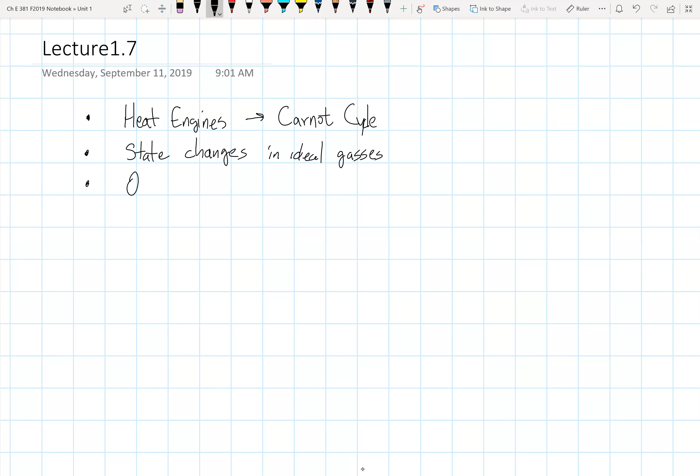So ideal gas equations are useful even when you're dealing with real gases. And then we'll start to talk about process analysis, where you're using entropy calculations. Somewhat analogous to an energy balance, we're going to have an entropy balance, with the main difference being entropy is not conserved. In the ideal world, you can have conservation of entropy, and that's a reversible process. So it's only conserved for a reversible process, and that's where delta S is going to be 0.

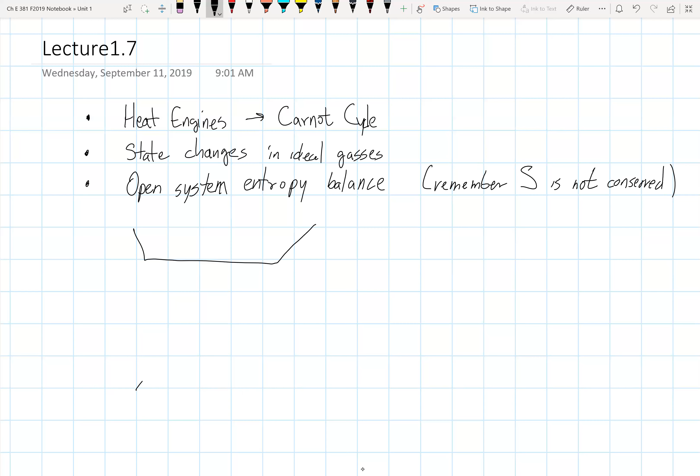Okay, so let's start with the heat engines in the Carnot cycle. So the last thing that I did on Monday was start to argue why heat can only go from hot to cold. So the picture that we have is we've got a hot source and a cold sink, and you've got some heat that's leaving the hot reservoir. It's going into some process, and then it exits to the cold reservoir.

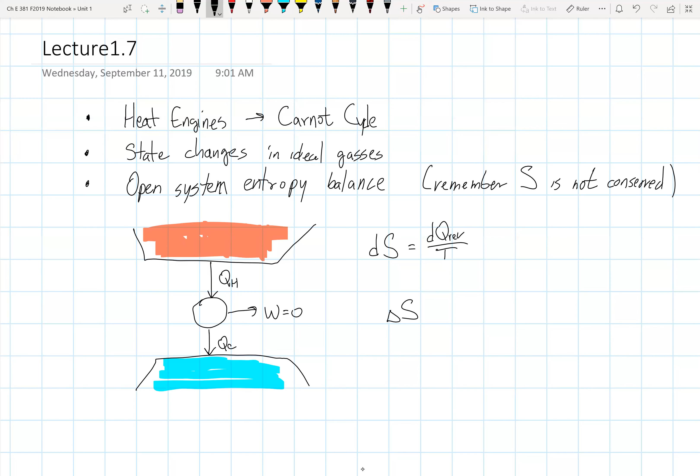So if we start with one of the expressions of the second law, that says that changes in entropy are equated to a reversible heat flow divided by the thermodynamic temperature. And so if all this process is doing is transferring heat, so there's no work involved, then the delta S for that process with respect to the process is going to be minus QC times TH minus TC over TC.

Okay, when we go through these analyses, the signs are going to drive you bonkers. They drive me bonkers, and I guarantee I'll get it wrong at least once unless I'm in truly good form, and I don't think I've had enough coffee yet this morning to guarantee perfect performance with respect to signs. Okay, so the heats that I'm going to be using, this is defined with respect to the process.

So given that, is QC positive or negative? I know it's hard to talk, but you can raise your hand. Positive or negative with respect to the process? I want you to talk about it for 30 seconds, and then I'll take the poll one last time. And I want big, exuberant hand raises this time.

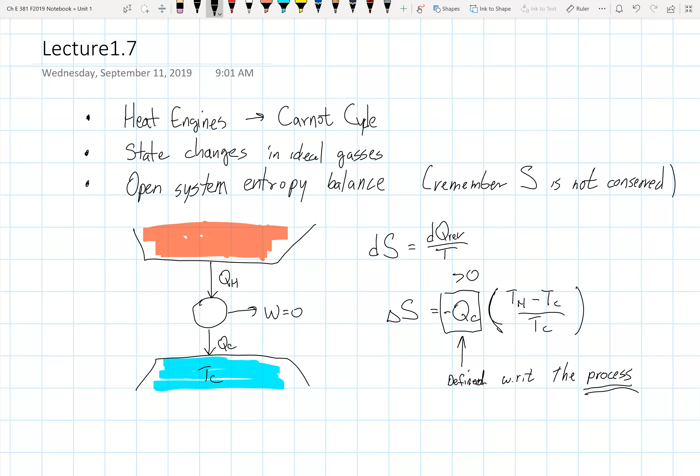All right, and this is a good thing because the second law says the delta S has to be greater than 0 for a real process, or it can be equal to 0 for an imaginary reversible process. So written this way, this is greater than or equal to 0 if and only if TH is greater than TC. Yes?

It's the same thing, just a different algebraic expression. On Monday, I didn't include the process, so my sign convention for Q's was different, and this is the same thing the book does. If you read the beginning of chapter 5, I'm kind of tracing through that derivation for you.

Okay, so first, that says that entropy can only increase if the hot is actually hot. All right, and so that's why heat flows from hot to cold. The second part of that is the only time we get to delta S equals 0 is when TH equals TC. All right, and looking at the math, that's kind of a, well, of course it is.

That's obvious, but conceptually it's an important observation because heat transfer is only reversible when there's no temperature gradient. So there is no heat transfer if it's reversible. There is no such thing as reversible heat transfer.

It exists completely as a figment of our imagination, which kind of makes this numerator part look a little fishy, huh? If heat transfer is never reversible, then how do you imagine it being reversible? Well, it's the isothermal process that we've been pretending is reversible.

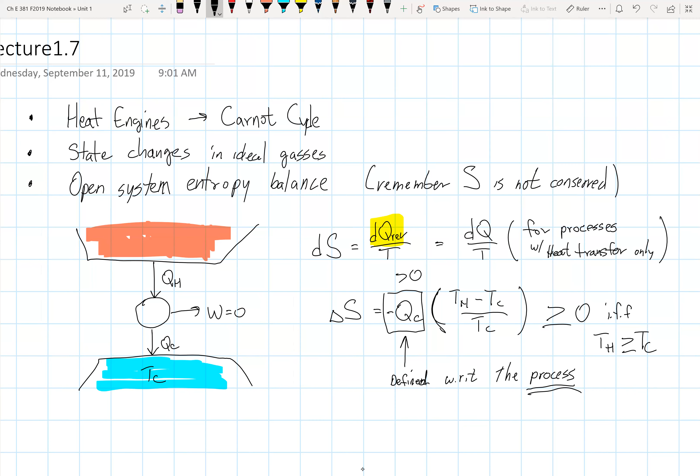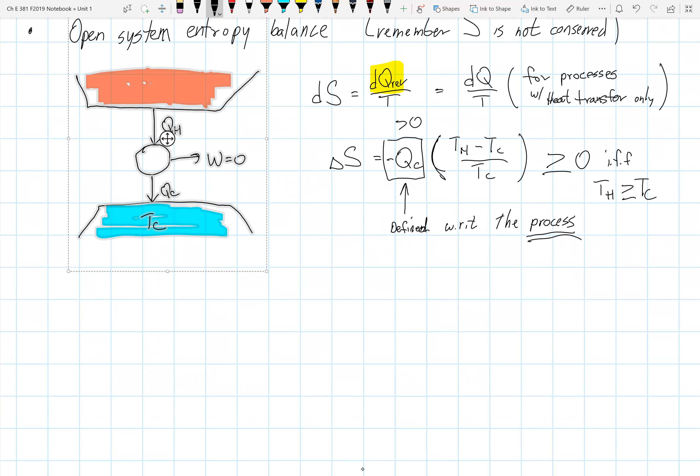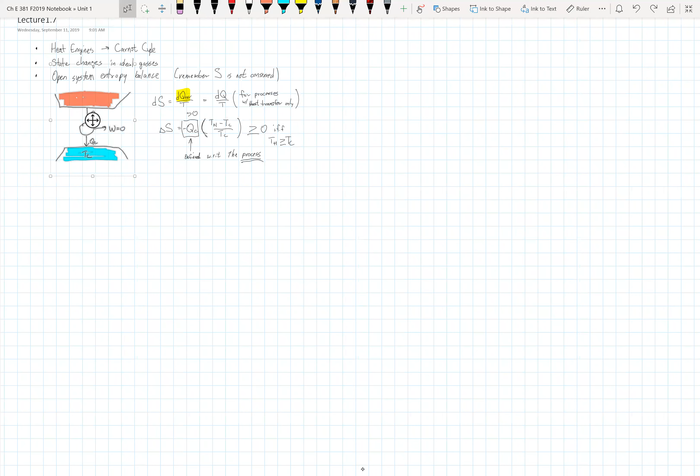All right, so now let's look at this again. Except now let's not constrain ourselves to a process that doesn't generate any work.

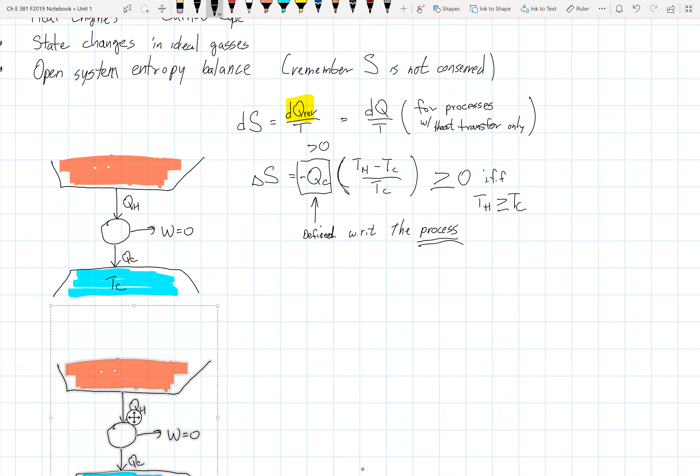All right, I want to be able to draw on you again. Perfect. All right, so we're going to take another copy of this diagram here, and so now the work doesn't necessarily have to be equal to 0. Okay, sign conventions again, is work positive or negative?

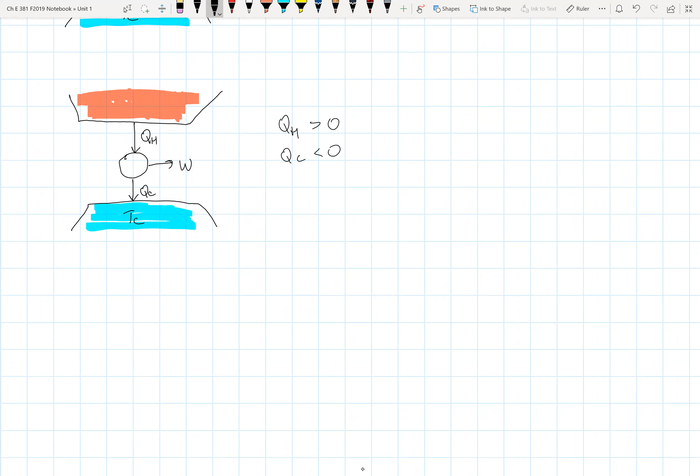It's negative, it's going out of the engine. So with respect to the engine, QH is greater than 0, QC is less than 0, and W is less than 0.

Now, previous editions of the text, when they went through this derivation, as an effort to make keeping track of all the signs easier, they used the absolute value bars on the heat symbols, and that's also something that I did slightly differently on Monday. I kind of like it that way because it helps me focus on the math and not trying to keep track of what's positive or negative.

But you can also make arguments that it's better without the absolute value signs because it makes the statements of the energy balances, for example, less prone to making mistakes as well. So let's look at this process then. We're going to use both first and second law now to get to the equations that we want. All right, so this thing, we're going to call this a heat engine.

And like the engine in your car, heat engines operate in cycles. So they go through a series of steps, and the state of the engine is exactly the same after one complete cycle, and it's ready to go again. So every time it goes through a cycle, it's going to consume some heat, produce some work, and eject some heat. So over one full cycle is what we're going to do an energy balance on.

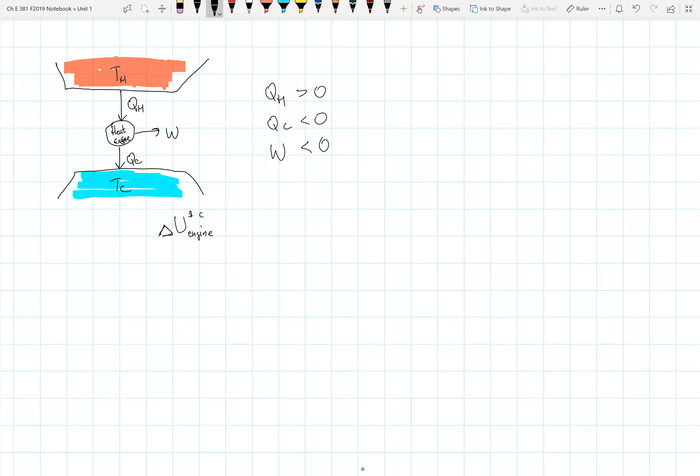So the change in internal energy for engine for one cycle, and it's a lot of decorative superscripts and subscripts, and I'm not going to write them every time, but I just want you to have that in your mind, that's what we're talking about here.

So I'm just going to say delta U for that, but we're talking about the engine, one complete cycle of the engine. Because it's a complete cycle, the state is the same at the beginning and the end, so there's no change in internal energy. Likewise, the overall change in entropy for the engine - both delta U and delta S are going to be equal to 0.

Okay, so for the energy part, delta U is going to be equal to the work produced by the engine - remember that's less than 0 - plus the total amount of heat injected into the engine. So that's plus QH plus QC, where QH is greater than 0 and QC is less than 0.

Because the sum of those things has to be equal to 0, we can immediately conclude that the work produced by the engine is just the negative of the sum of the heats consumed by the engine - the difference between the amount of heat going in and the amount of heat going out.

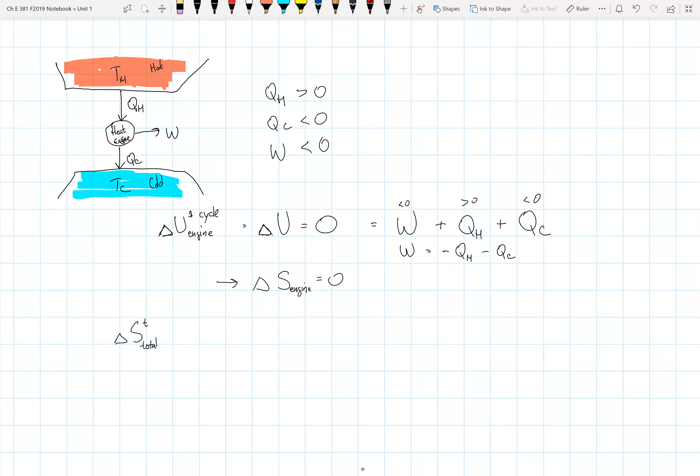So the delta S total, the delta S of the universe, that's going to be the delta S for the hot reservoir, the delta S for the cold reservoir, plus the delta S for the engine. And we've already agreed that that's got to be 0 because it's a cyclic process.

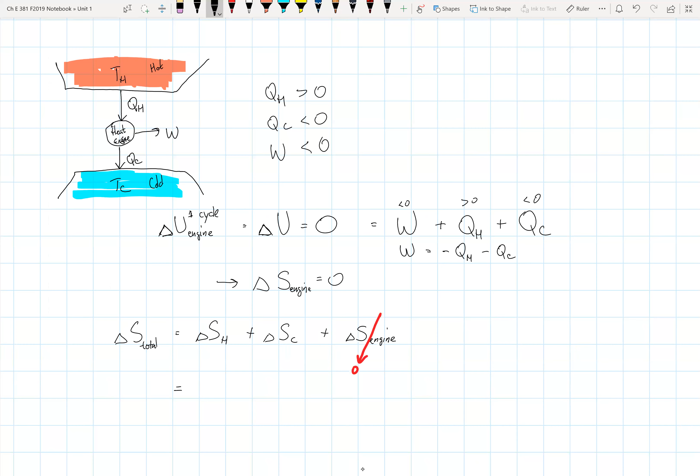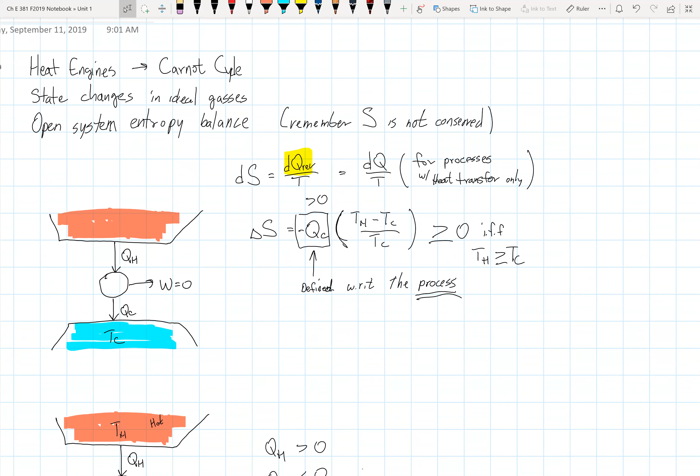All right, so the delta S then is going to be, for the hot reservoir, we're going to go back up here, and we're going to remember that changes in entropy are equal to heat flows divided by temperatures. And here is a place where you got to be careful with signs.

I wrote the symbols QH and QC with respect to the process, which means they are backwards with respect to the surroundings. So the amount of heat flow with respect to the hot reservoir is not plus QH, it's minus QH, because the arrow is pointed in the wrong direction with respect to the reservoir. That's a subtle point, and this is one of the easier spots to lose track of the signs.

And then the temperature over which that transfer happens is TH, of course. And then likewise for the cold reservoir, positive QC, even though QC is less than 0, plus QC is with respect to the heat engine. So if we're doing an entropy tally, that's going to be minus QC over TC.

And that's delta S total right there. All right, and remember second law says that this better be greater than 0, or if we've got our thought experiment hats on, then we can allow it to be equal to 0 for a perfect process.

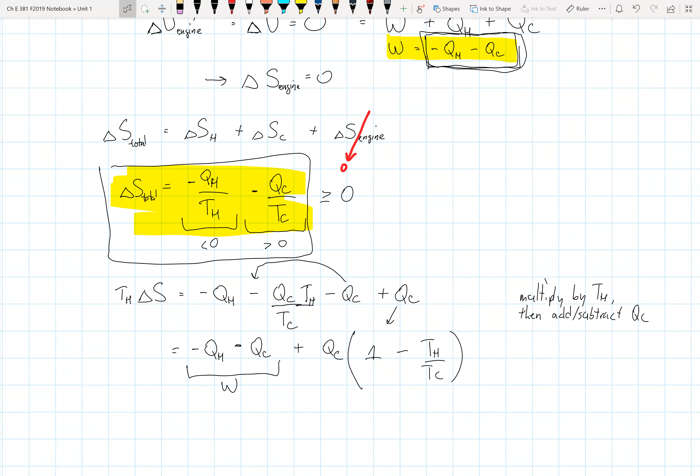So now to get the first law in there, we note that this is W by my first law equation. So that means that TH delta S is work plus QC times 1 minus TH over TC.

And if I want to rearrange this for work, which I do, we're going to say work equals TH delta S minus QC times 1 minus TH over TC.

So now that we're here, the first observation is that this is the work produced by an ideal heat engine when delta S is equal to 0. And for a real heat engine, delta S is going to be greater than 0.

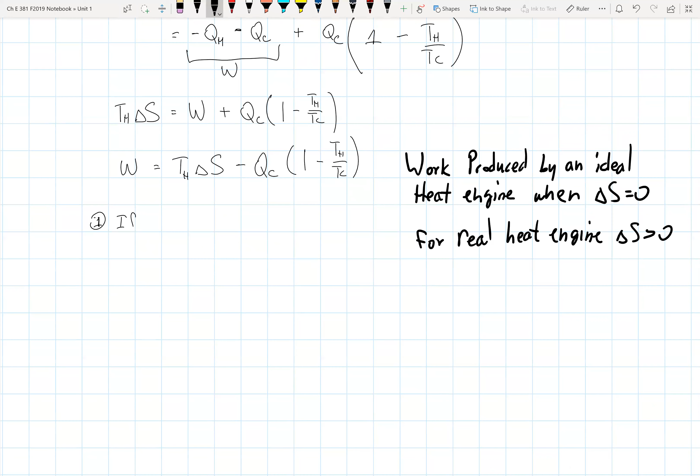So there's a couple limits of interest. The first is, what happens if there is no work? So if there is no work, then this just reduces down to a simple heat transfer that we started with. If there's no work produced, W equals 0, and we end up with delta S equals minus QC over TH times...

1 minus TH over TC. No, I don't want that minus there. So this one is just a rearrangement of this one.

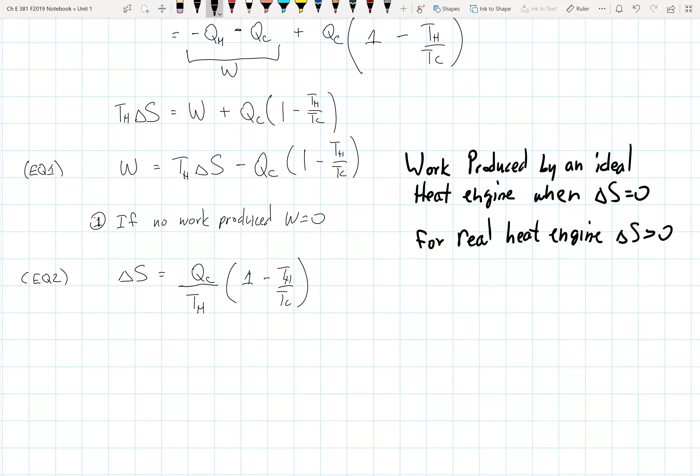Maybe it'd help if I numbered my equations. So equation 2 is just a rearrangement of equation 1. And if we go back up here, this is the same as equation 2.

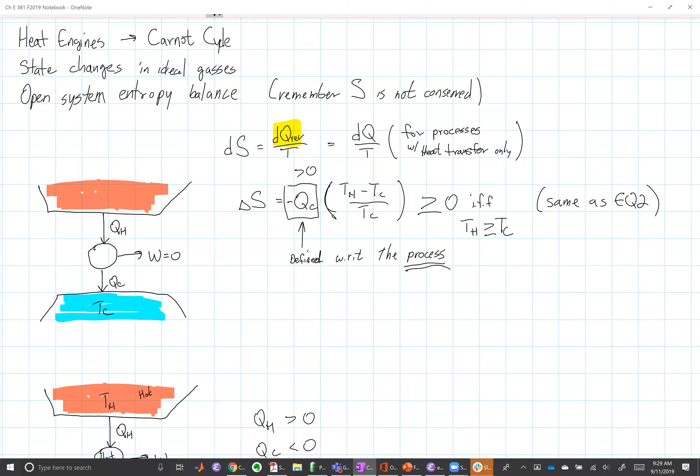So if work is equal to zero, a heat engine that produces no work is just describing a heat transfer from a hot to a cold body. Okay, and then equation 3 then, this is going to be Carnot's equation.

So if delta S equals 0, the heat engine is ideal. And so it is called a Carnot cycle in honor of the inventor of these equations.

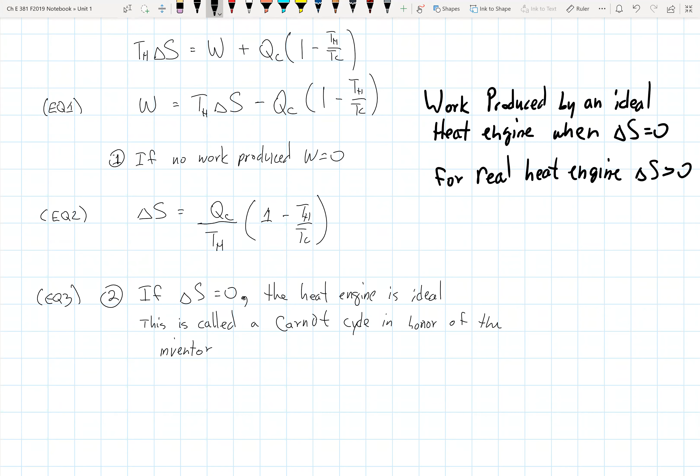Carnot was a French engineer. So if we take the delta S out of equation 1, then we simply get W equals minus QC times 1 minus TH over TC. I believe the book prints this equation with the subtrahends reversed, which changes the sign, so that's the same thing.

And another rearrangement that you'll see published will be TH over TC minus 1, or the minus 1 can also appear in the numerator as TH minus TC. And so these are all collectively called Carnot equations.

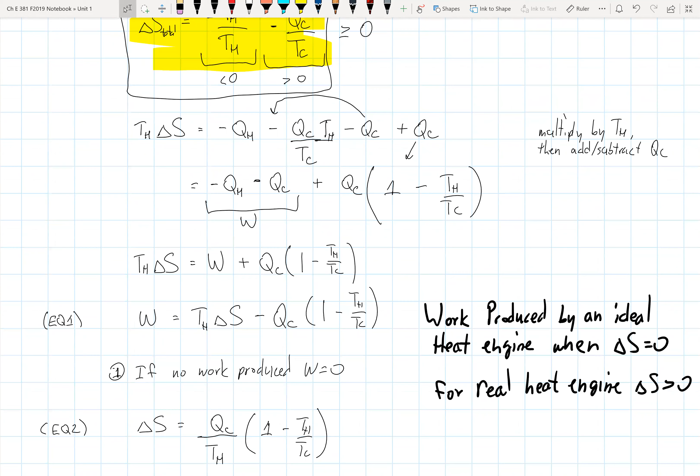So another thing that we can do is go back up to first law. So let's call this one equation 5. So I can make a first law substitution again, that's first law from above. And so what that substitution looks like is minus QH minus QC, plugging in for the work term.

For that piece of it right there. And so that's TH over TC minus 1.

You doing all right? Good? All right, so we get to another Carnot equation pretty quickly here. So I'm just going to split the fraction up on the left. So I'm going to have minus QH over QC minus 1 equals TH over TC minus 1. And I've got minus 1s on both sides that can be eliminated. And we get to yet another Carnot equation.

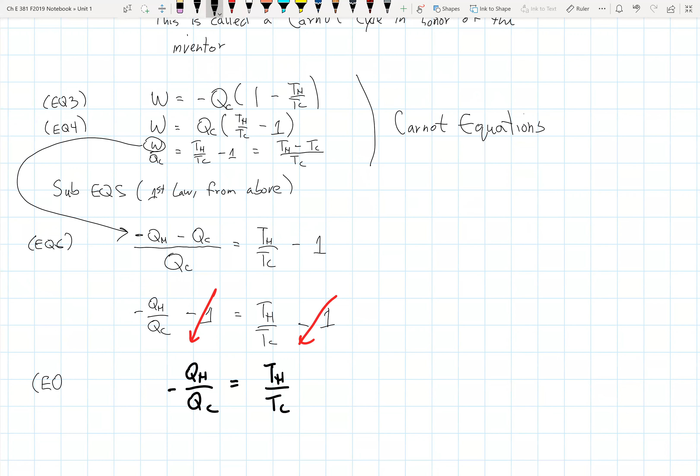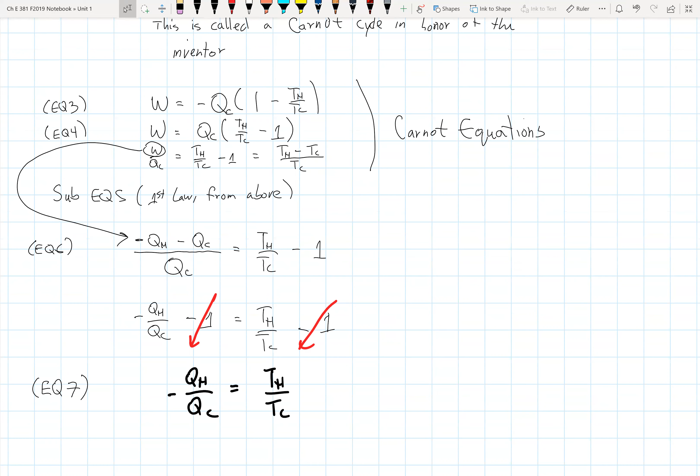All right, and that one's also pretty useful. And there are a few others. There's one more incarnation in the book that's pretty easy to get to. They're all interchangeable though, so if you were to remember two of them, I would remember equation 4 and equation 7.

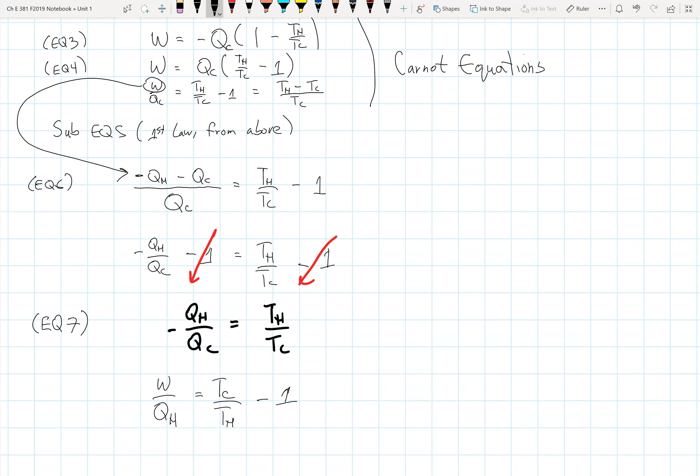And there is another one in the book, which is W over QH equals TC over TH minus 1. I don't want to spend too much time on algebra. So this is where I am in the book.

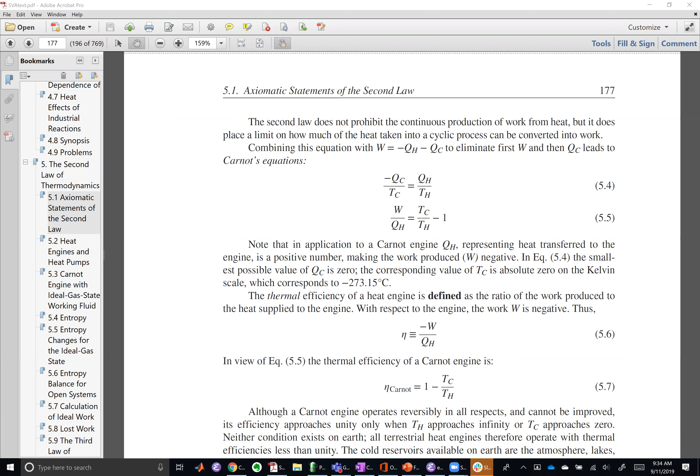All right, so all these equations allow us to manipulate relationships between the temperatures of the reservoirs, the heat flows going into and out of the reservoirs, and the ideal amount of work that any process converting heat into work is able to achieve. So what we're interested in is how much work, that's the valuable product, do we get for the price? That's where we start to talk about efficiencies.

And so the first efficiency that we define in the course is the thermal efficiency. In words, this is simply what we want over what it costs. So QH comes from the combustion of fuel or whatever, and the electricity or motivating power that drives your automobile, or the work product of a turbine, is what we're paying that cost for.

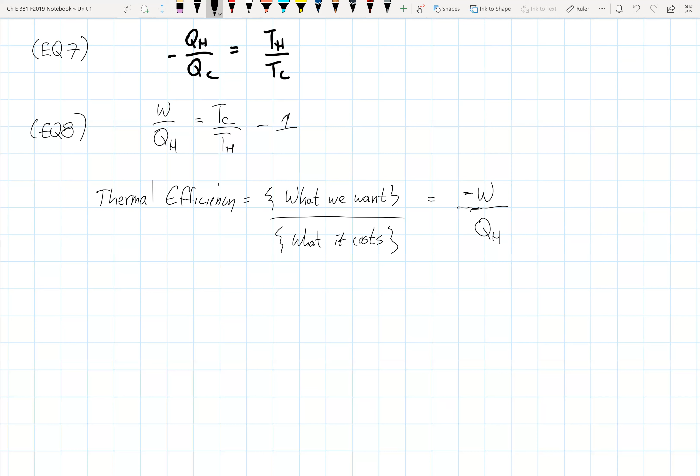So for a heat engine, the thermal efficiency is going to be the ratio of what we want over the cost. And because we've defined W with respect to the engine, W is negative, and we like our efficiencies to be positive, so we've got to put that negative sign back in there. Just as a quick example we'll get to in a second here - eta is the symbol we use for efficiencies in the course. So this is this expression, we'll call it equation 9.

So that's going to be the Carnot efficiency, and it's going to be the maximum that you can get. So Q over W... sorry, one more step. We'll do equation 10, that'll be the Carnot efficiency. So equation 9 is a generic definition of efficiency, and then the equation 8 version,

we have a substitution for W over QH that puts things in terms of temperatures. And so what happens now is the thermal efficiency for an ideal cycle is just going to be 1 minus TC over TH, where the ordering of the subtrahends again flipped because of the minus sign. All right, and so that says that you can only perfectly convert heat into work if your cold reservoir is at 0 degrees Kelvin. So that is the limit that allows you to have perfect thermal efficiency.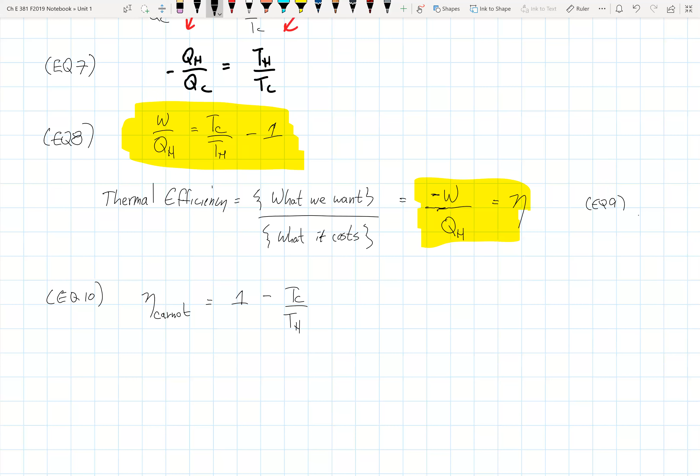So cooling towers, you'll see them outside the cogen facility - those are your QC reservoirs right there. You're working at basically atmospheric temperature for your TC. For your TH, if you're burning natural gas, you can get flue temperatures easily around 800 to 1,000 K. Those solar concentrators that I was talking about are also generating recirculating fluids that have really high temperatures like that. So the quality of your heat is directly related to its temperature - you want it hot, and very cold, and you get better thermal efficiency.

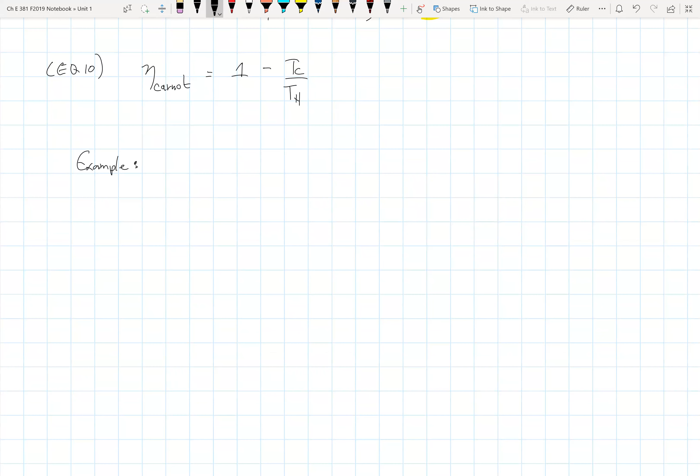So just as a typical example, if you want to see what a regular power plant might be operating at: suppose we have a power plant that's generating 800,000 kilowatts. It uses steam, and that's going to be at 585 Kelvin. And it's dumping waste heat into a river at TC equals 295 Kelvin.

And the plant is not a Carnot plant, it's a real plant, so it's going to operate at a fraction of ideality. Some of the best turbines in the world can approach 80% efficiency, which is actually not too bad. A more realistic value might be 70%.

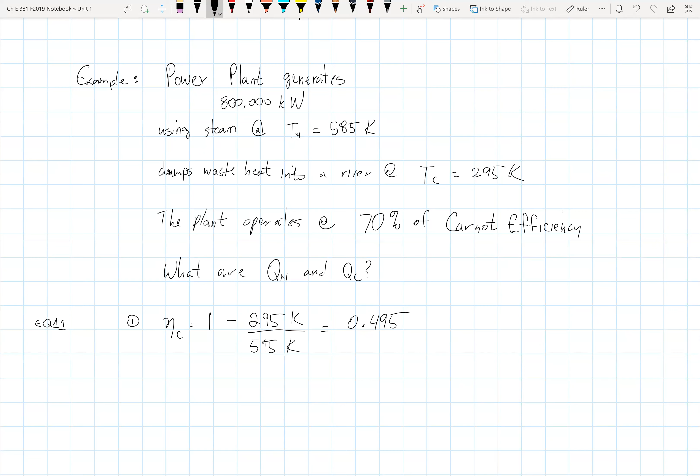So the 70% sounds pretty good until you realize the perfect heat engine here is going to be wasting half of what it burns. So half of a perfect process's fuel consumption just goes to satisfying the second law.

All right, so once we've got that, then we need to find out what the actual efficiency of the process is. So the thermal efficiency is, remember, minus work over QH. And that's going to be 70% of the Carnot efficiency, so that works out to be about 35%.

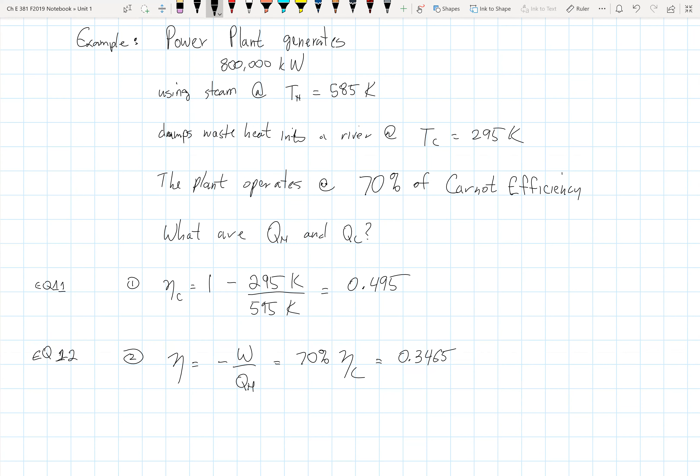Or if you work it out to more digits than we need, we get 34.65% real process efficiency. And then to solve for QH, it's a simple multiplication there.

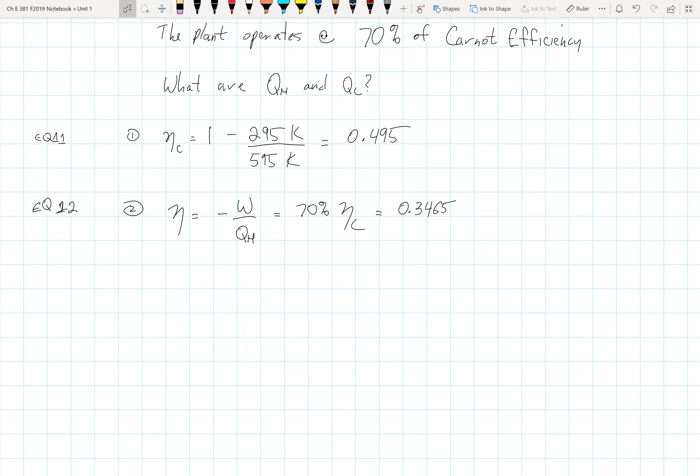So QH is going to be roughly 3 times the amount of work, and I don't have the actual number written down, so I'm not going to take the time to write it because I'm running short on time. I will write the equation down though. So QH is going to be minus W.

So the W is 800,000 kilowatts divided by 0.3465, and that is going to be roughly 2.35 megawatts. So my in-head estimate there is just basically multiplying that by 3 and then shaving off a little bit because I'm not dividing by a third, I'm dividing by a number slightly bigger than a third.

I do have a number for QC written down though, so we'll go all the way there on that one. So QC plus QH plus W equals 0, right? So W is going to be negative 800,000 kilowatts, because QH is therefore going to be minus QC minus W.

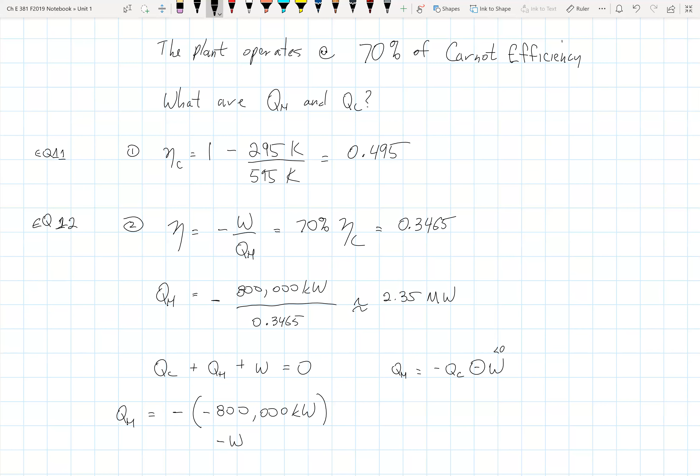All right, how about QH, is QH the right sign? Yeah, and that is just a typo. Yeah, so I got the sign right on the right-hand side, but just because I made 2 sign mistakes, right? Two wrongs make it right every now and then. All right, thank you for keeping me honest there. So we'll call that 13, and that one 14. So even in these simple problems, you can make some simple mistakes that can be hard to hunt down if you're not careful.

So now we're going to do minus QC. I wanted to solve for QC, didn't I? QC is minus W minus QH. All right, so QH is positive, so this is going to be a simple negative number. All right, and so now if we work it out to the full number of digits, we're going to get to 1,510,000 kilowatts. And this is what goes to the river.